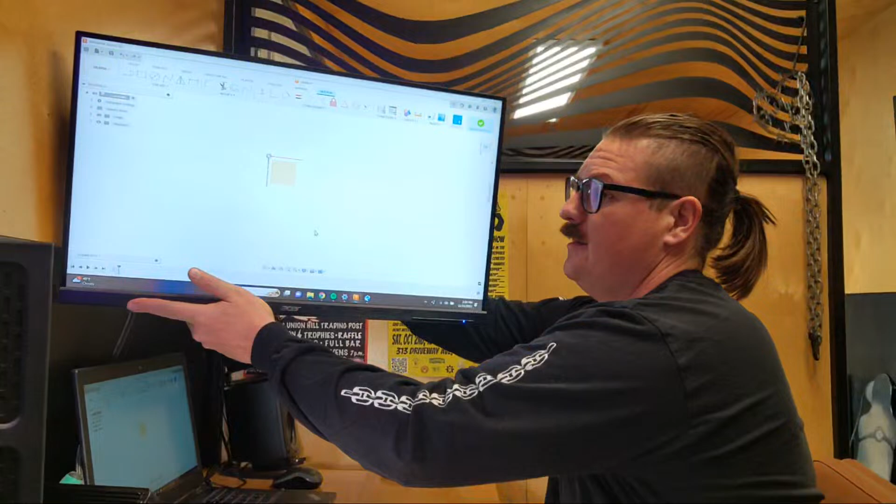So I got some bid work done, and now I'm going to design a log storage rack. It's fire season here. Let's see, can you guys see this?

Hope you guys can see that all right. The firewood is making a huge mess next to my fireplace, so I figured I would draw up a log storage rack, cut it out on the laser, and make it hopefully this weekend. We'll see if I can get it cut out on the laser. We're in full-on Christmas mode here at the shop, so I'll have to see if I can get the laser time.

Alright, let's get this oriented how I want it. Front is front. And I'm going to do kind of a basic design here. Start a new sketch.

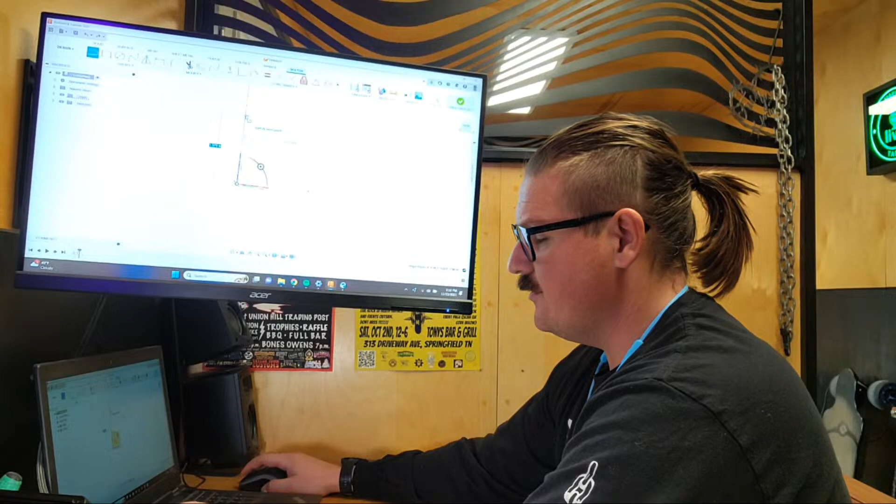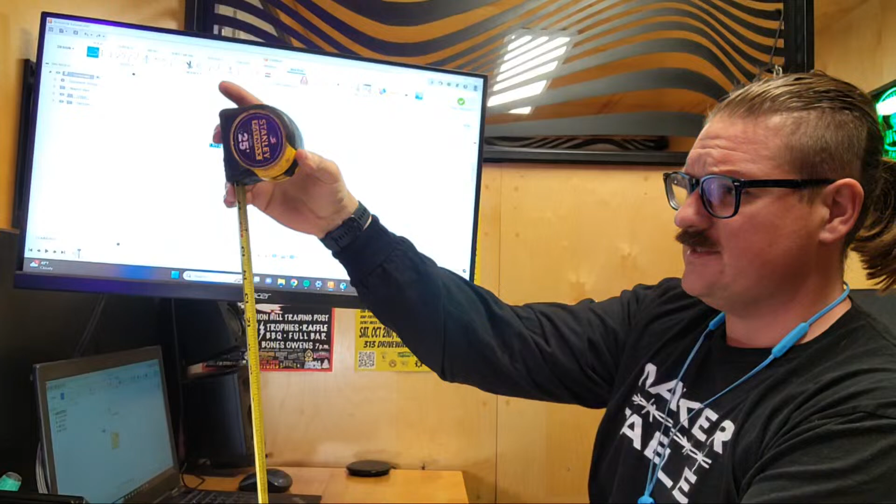I'm going to start this as a line drawing, so we're going to go up. Storage rack probably needs to be not too big—if it's too big, it's going to be heavy. I'll call it 20 inches tall overall, I think.

And then width-wise here, maybe only 14 inches or so, maybe 16. I definitely want it taller than it is wide.

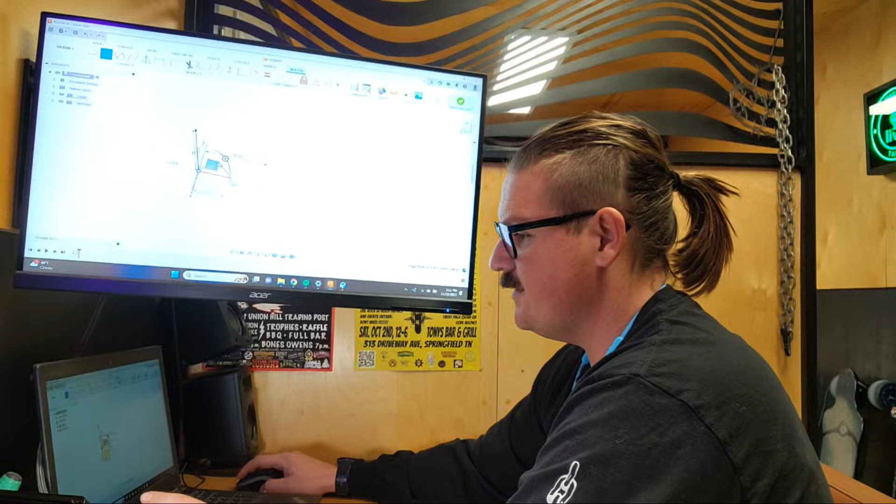Let's see if we've gone into 3D sketch here. No, we're still on the same plane. I hate when Fusion does this here—it's trying to draw on this plane down here. It's a new feature, and I'm not crazy about it. Let's see if I can... nope, it still wants to sketch on that plane.

So let's go ahead and undo that, and we'll try a new sketch. Now that we're locked on this plane, it should work out a lot better. I will resist the urge to rotate.

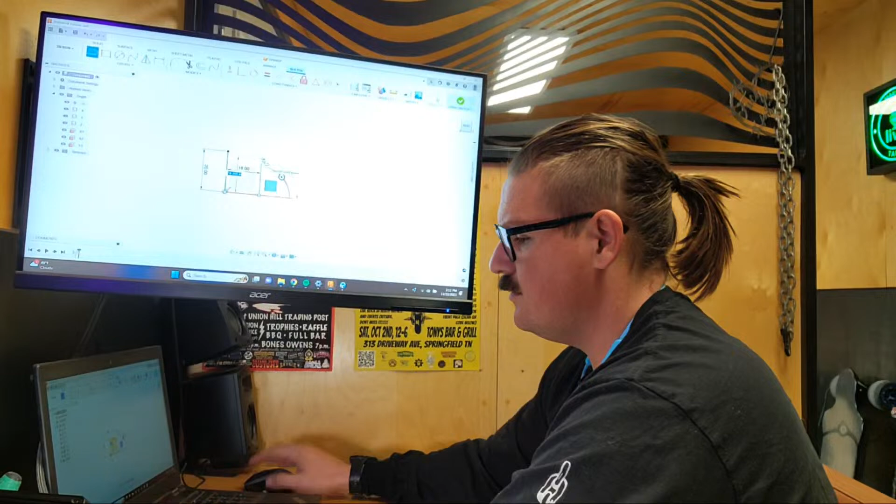Alright, so we have our basic shape here. I'm going to create a sheet metal body out of that by selecting these and then drawing this through right here in sheet metal. The average depth of a log, I think, is only 16 inches. So we'll start this out as 16 inches deep.

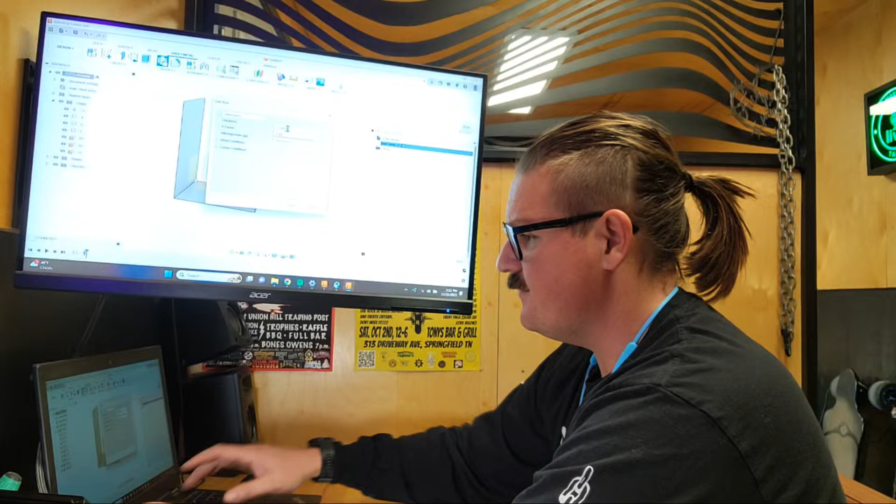I think that's looking pretty solid. And then I need to change this to the thickness of material I'm going to actually use. So I went up here in sheet metal, modify, hit the little pencil, and I'm going to make this out of some 3/16, so it's kind of heavy—0.1875. There we go, now we got nice beefy material right there.

Should look good. Eventually I'm going to fillet these corners, but I'll resist the urge to do that right now—it'll just make some of these later operations a little bit harder if you do that. But that's the basic shape.

Then I think I want a little pocket here for kindling, so I'm going to make an offset plane. We're going to bring that down, call it a 5-inch space down there for kindling. I think that should work.

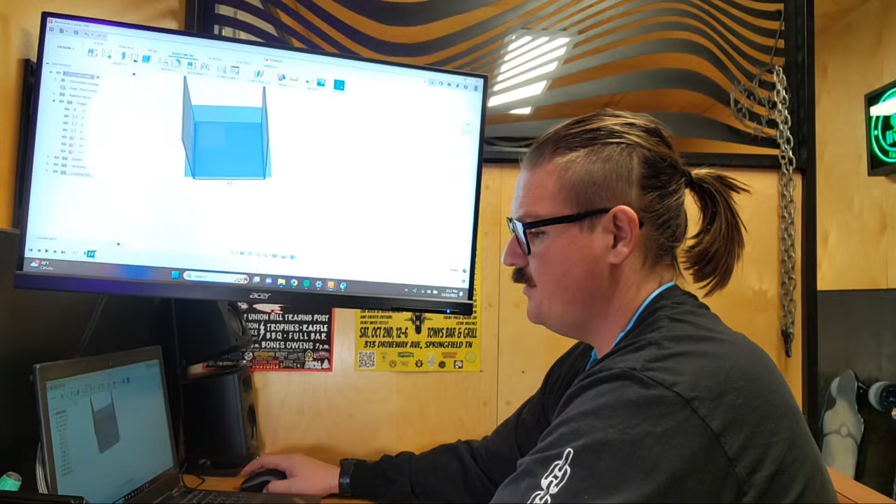Go here, and we're going to project a couple things onto that plane. I'm going to use these edges right here, and draw a rectangle off of this corner to this corner. Since we made that offset plane, we're going to be right where we want it to be when we extrude this.

There's my material thickness—make sure you select new body, you don't want to join these together yet, because eventually I'm going to export these all as plates individually and send them off to the laser as flat pieces. Then they'll get formed and welded later on.

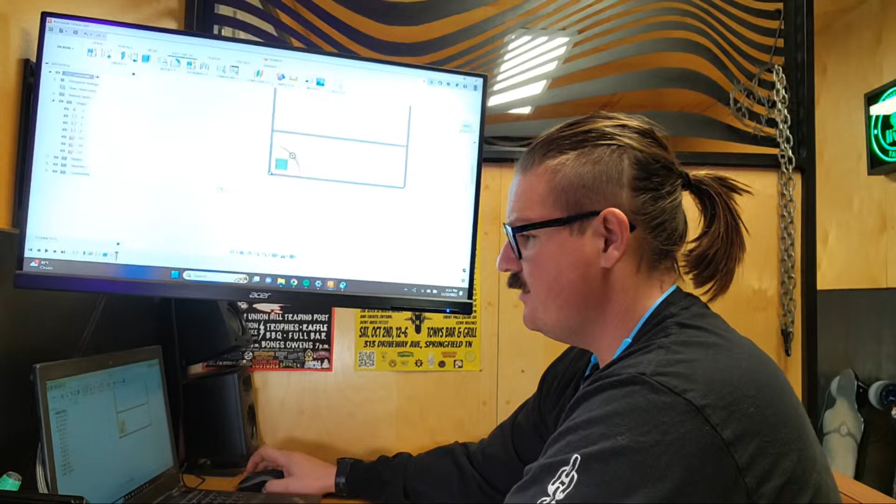So I think that's a good basic shape. Now I need to kind of play with some feet so this doesn't sit directly on the floor. We could try some—I've got some cool rectangle tube that's 3x1. Kind of see how that's going to look.

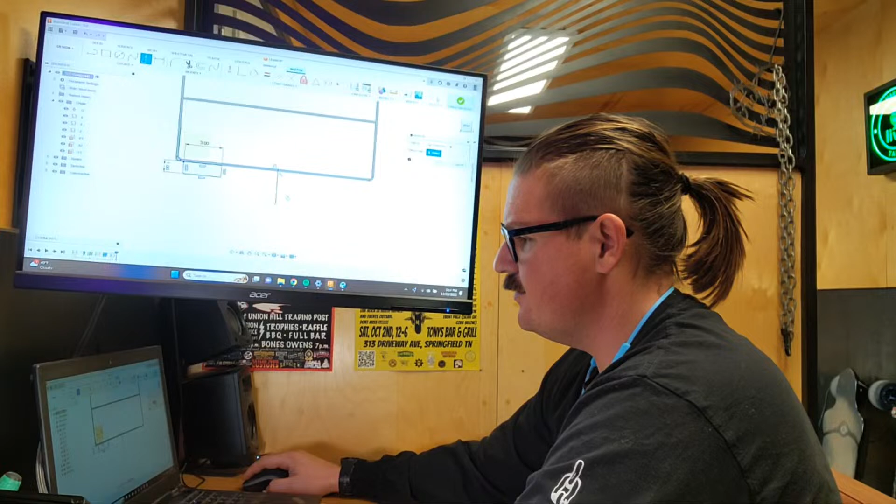Use our line tool, find your midpoint there with the delta, the triangle, and then we can use this mirror tool right here. Select everything you want to mirror, your mirror line, boom, right there—now we've got it equal on both sides. And now I'm going to extrude these, new body, and just kind of see how they look.

I don't know if I'm crazy about that. I think we could do better. So we could try to rotate these, see if it looks any better. But I'm not sure that's going to do it.

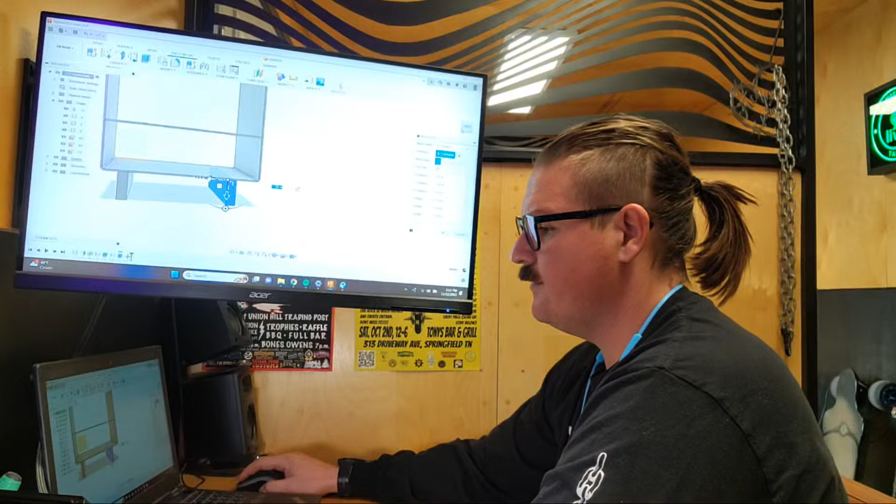That actually helped. I think because we already have kind of a rectangular shape going here vertically, if we keep the feet rectangular, it'll carry the look.

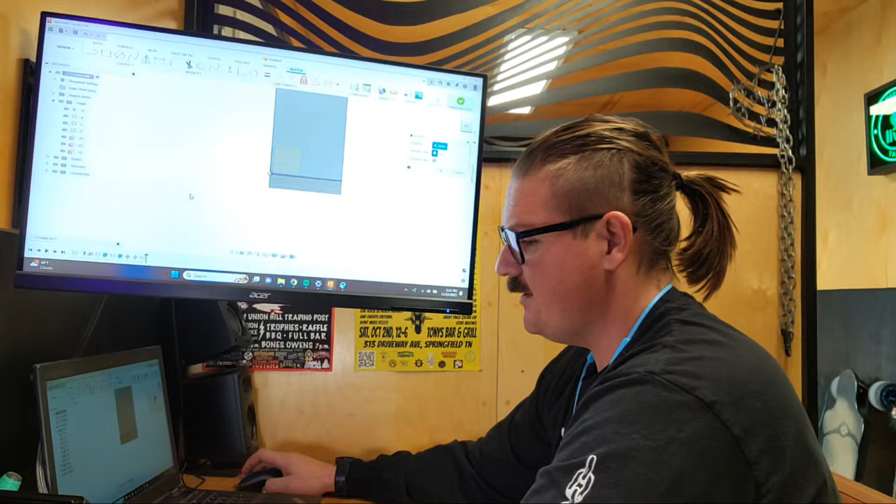So I like that. Now I'm going to make some openings here to make this a little more interesting. I'll select that plane, hit P for project, hide this first body, and project this right here onto the surface we're sketching on now. Then I'll project this onto there too.

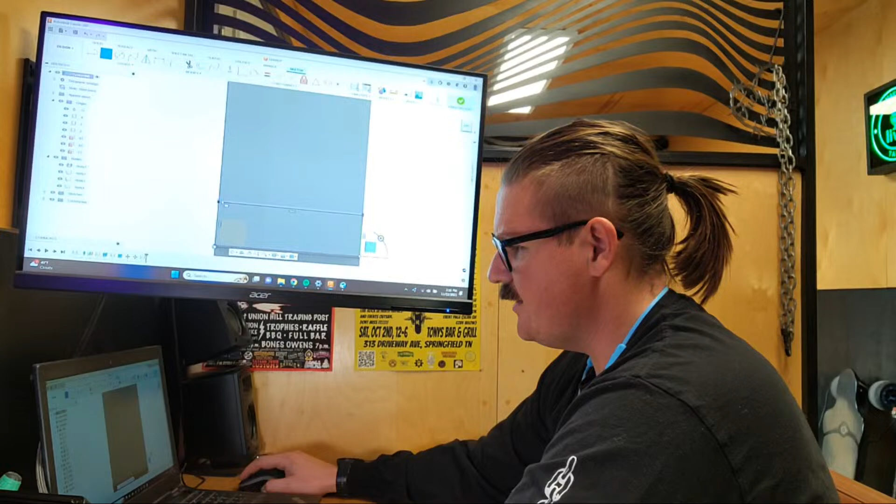And then I'll draw a rectangle here, I'll show you in just a second. We're going to use the offset tool to make an even opening on this entire body. Just hit O for offset, select that feature, that line, and then find a spot that looks cool, because eventually I'm going to extrude all this out and make it empty space.

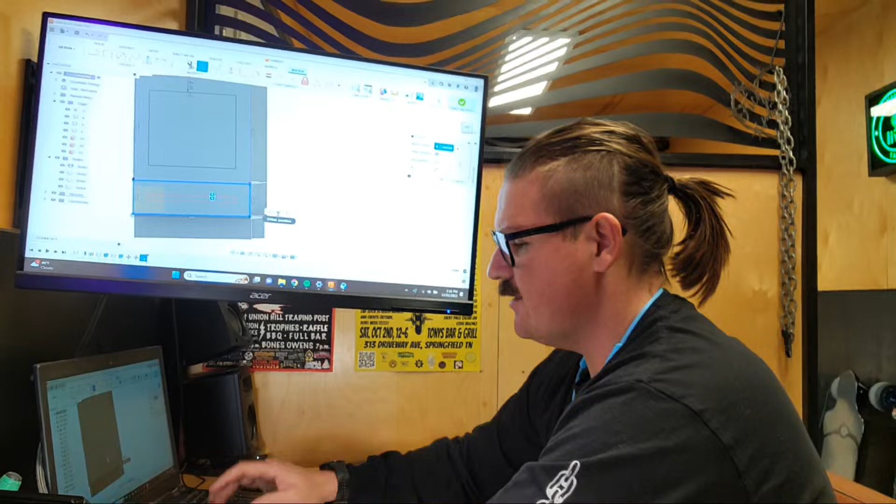So we'll do negative 2, and I guess we should really start with the smaller space down here, because that's going to dictate more what we can do. If we go 2 inch, it makes this pretty small, which if this is the kindling, we may not want an opening on the side anyways, to be honest. But let's try 1.5 — 1.5 looks pretty good.

So go back here, double click that, negative 1.5, and we can edit how that looks. From here we can extrude all the way through, E for extrude, draw that through, and bam — we've got ourselves what looks like a pretty solid log storage rack at this point.

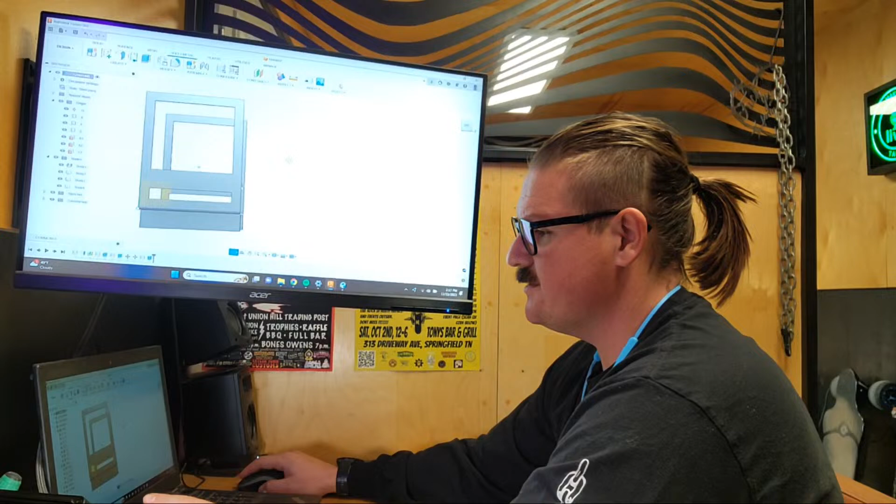So if you need to, at any point you can go back in the timeline right here, double click on this sketch, and let's say we want to see what 1 inch looks like. Double click on this, update that to 1, and then hit enter, complete sketch, finish sketch.

There we go. And it updated that extrude move because it was after that sketch, which is one of my favorite features of Fusion — this timeline. It makes it really nice to go back and edit stuff.

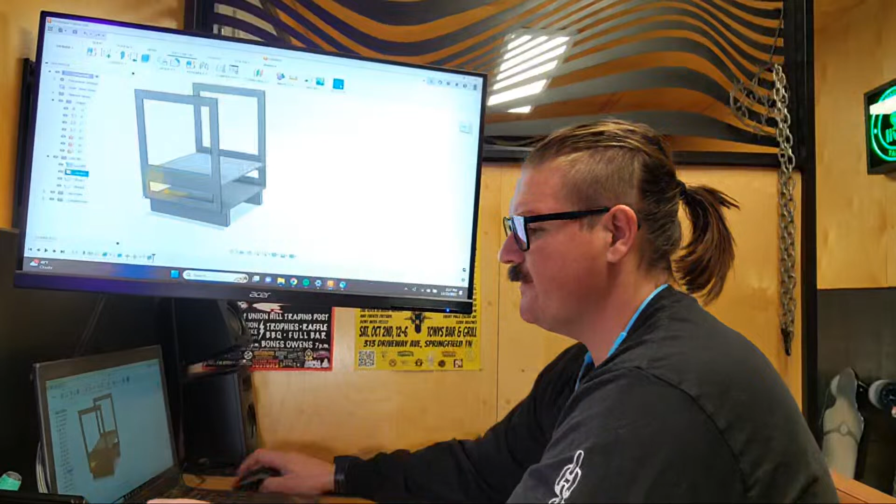But I like the thicker better, so I'm going to hit Control Z here and back up out to the 1.5. So pretty quickly, you can see we've got a log storage rack here.

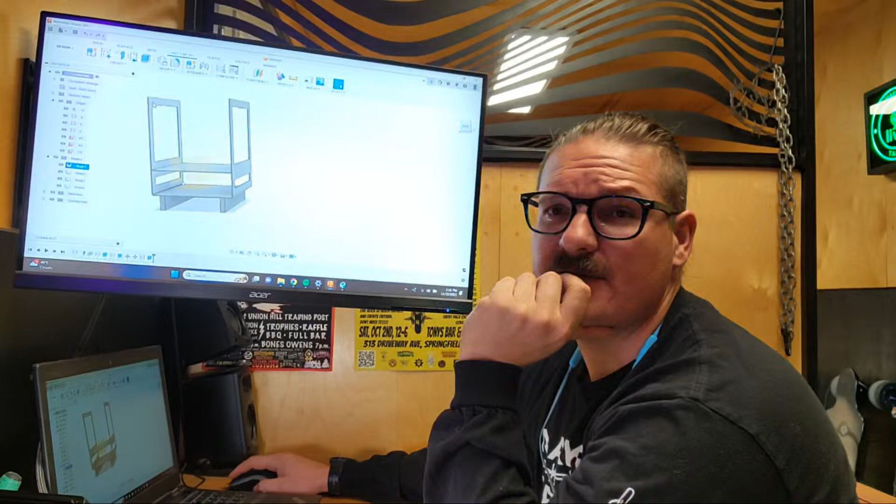We could go straight to the laser and press brake with this, but I'm afraid — let's see, if we remove that much material, this might get a little floppy here. I'm not sure how rigid this is going to be.

So there's a couple ways to fight that. One is put this material back in there, and two would be to add another plate back here that runs perpendicular to these. So let's go ahead and see what that's going to look like.

So we'll click on this face. I'm going to project all this sketch geometry right here, make sure all that comes through. And then we should just be able to take a line across the top here, close that shape out.

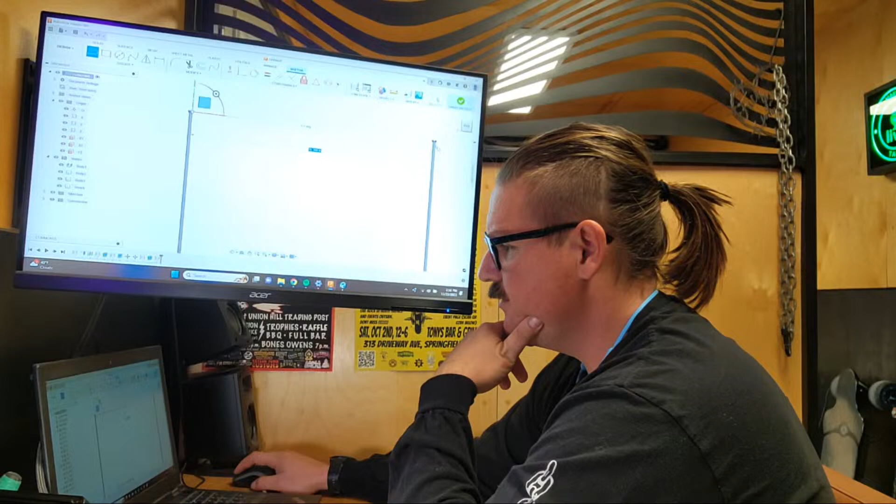And then we can use our offset tool again. No, it doesn't want to do it here, of course. Let's see if we can select this. Nope. Alright, so let's use our offset tool.

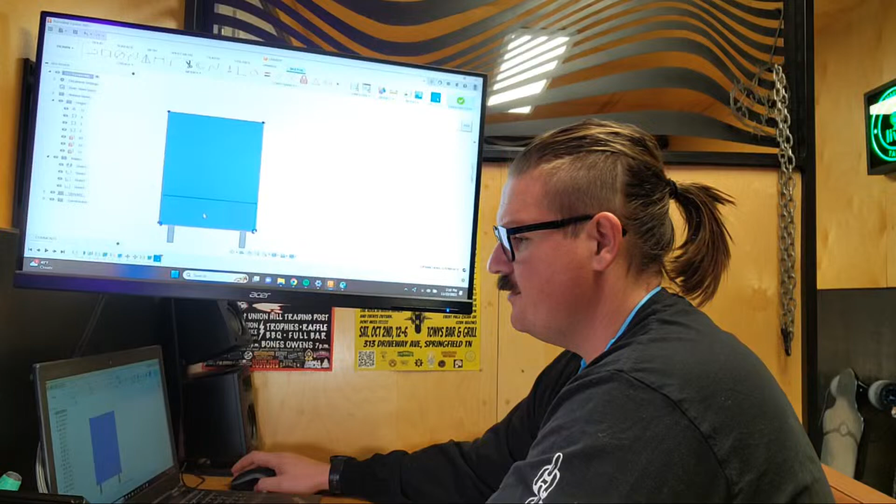We really have to take this shape, extrude it out 0.1, we'll do a new body here, really just doing that to get this whole profile over. And now we should be able to double click on this, single click, and then hit O for offset — now we have a defined edge.

We can do the same trick we did on the borders there. I think we used 1.5, so let's just stick with that dimension, keep everything looking cohesive, like it was planned this way.

And then from here we can draw some lines straight up to the top, straight up to the top, and now we can extrude this out.

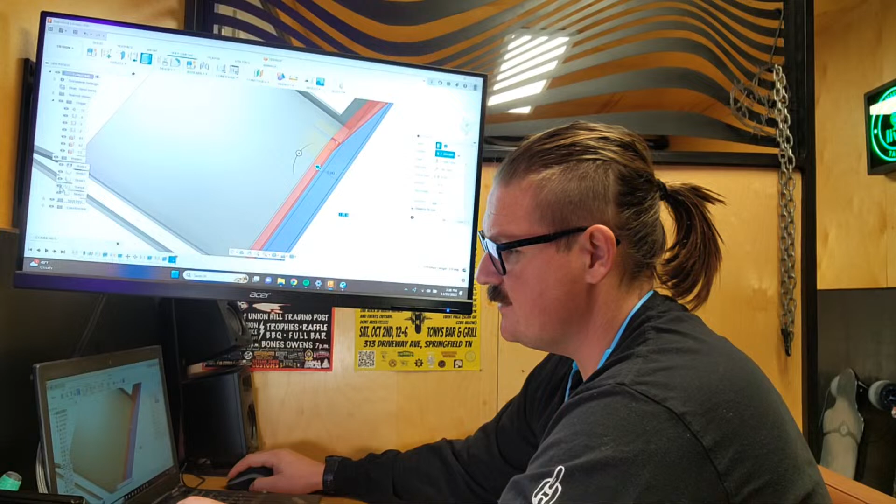But if we do that, it's going to actually cut this plate right here. So we need to make this plate invisible — where is it? There we go. Before we do this cut operation.

Then we can make it visible again. So there we go, now this trim is nice. I think I almost want it on both sides now that I see it here, it just gives it a more finished look.

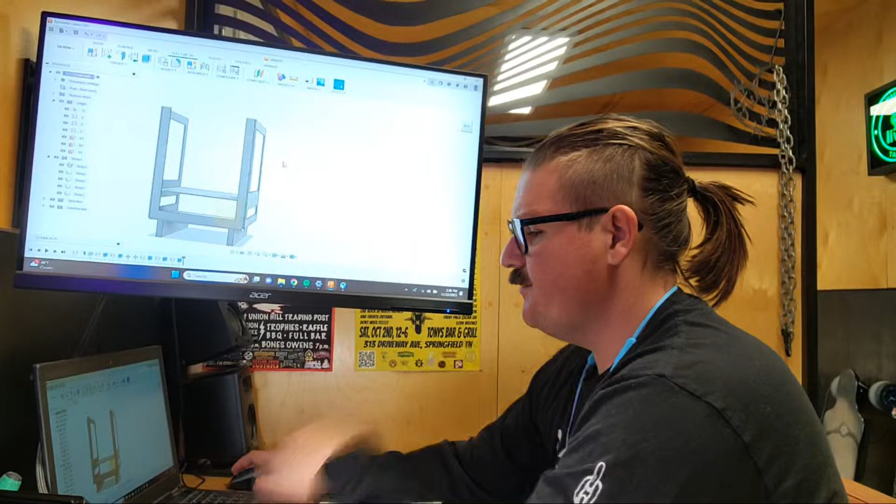Now that I'm thinking through this, the brake will not be able to bend this all as one piece. So I'm actually going to end up having to put a seam in this design, probably in the middle, or I could try to hide it and line it up with one of these feet.

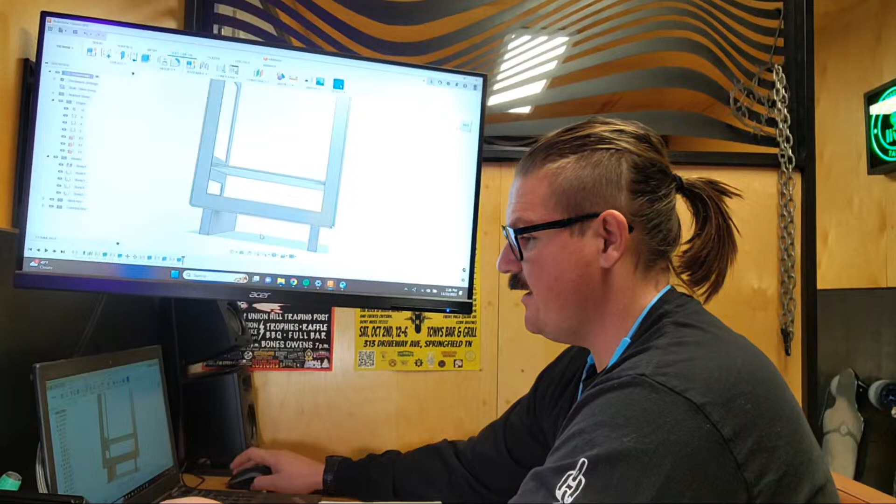But with this appearance plate we have, I can also do a Q move here. Should be able to do a Q, which is a press pull, and we're going to press and pull all these faces. I should be able to select all three of these, then pull them out and click on this face I want to drag it to, and it'll automatically snap.

There's my 3/16 that I put in for the plate. So now this plate actually swallows the other plates back here. So when I add a seam, this appearance plate will actually cover that seam right here.

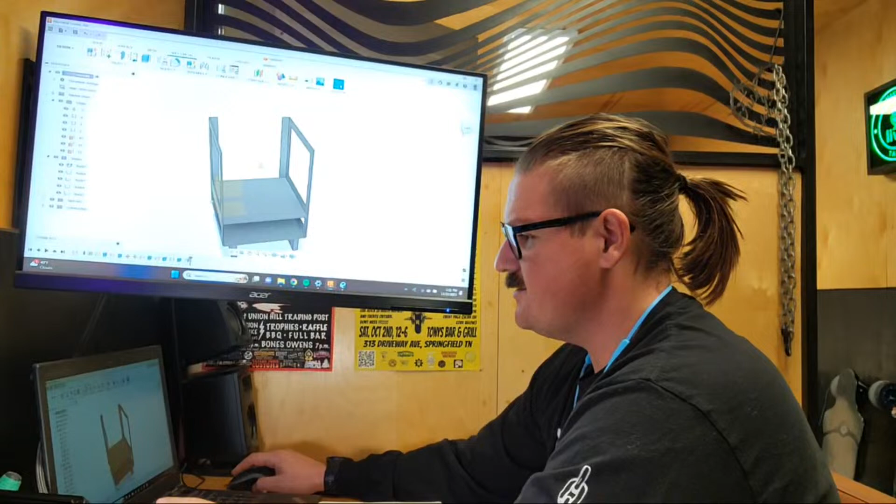I could save a little bit of money and cut this out of 16 gauge. It doesn't need to be very stout, but then it's going to look kind of cheesy and have a sharp edge right here if I cut this out of 16 gauge. So I'm going to keep this all as a 7 gauge product here.

So I think we did a 0.1, let's check, we'll do our inspect... see how much... okay yeah, 0.1 was the original extrude.

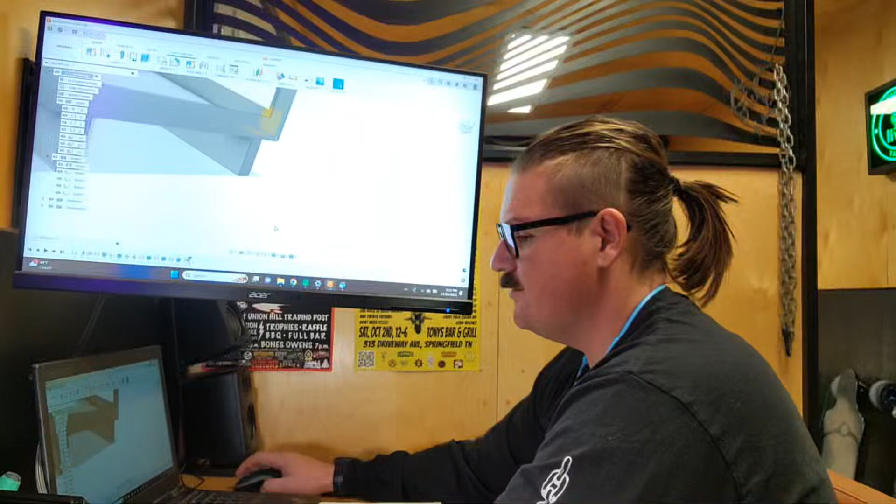So we're going to Q again, do the press pull. I'm not going to use extrude here because sometimes when you extrude and hit join, it's actually going to try and join that plate to the rest of everything else that it touches. But if you use this Q offset face, it's just editing the feature that's highlighted.

So 0.1875 is our thickness, and we've got that there.

So then I'm going to duplicate this across and see how it looks. Oops, undo that. Move, hit this, hit create copy down here, and then I'll slide this over and snap it to this face.

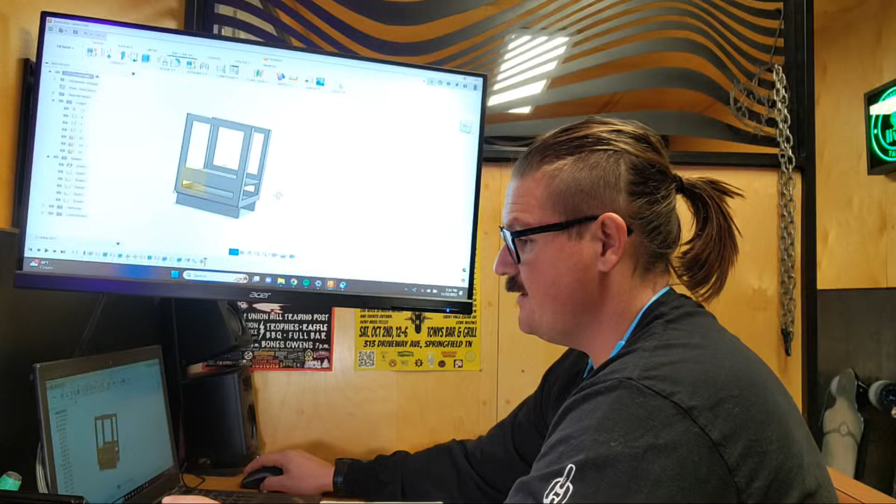Yeah, that's a pretty nice look right there. Super clean, really stout.

So now the question is, do we need to add a plate up here? Let's just draw it up and we'll see what it looks like. That's the best thing about CAD, at least one of my favorite things, is you can really see what something's going to look like without spending really any money at all. You just have your design time.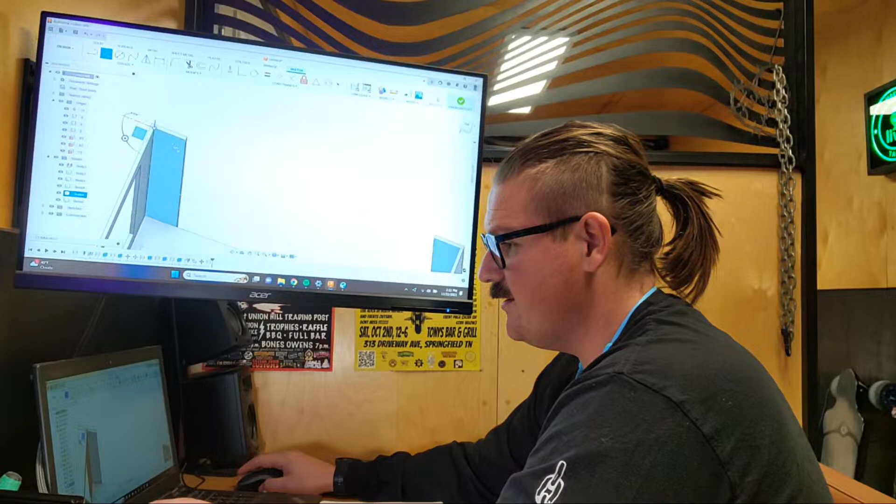So I'll go from this corner over to here, where previously, before I learned these tools, I would go out in the shop and actually start making stuff. Or I did a lot of cardboard cutouts and stuff like that.

Hit new body here so it doesn't join the rest of everything else. We're going to do a move, create copy, slide this over. Okay, this is pretty clean.

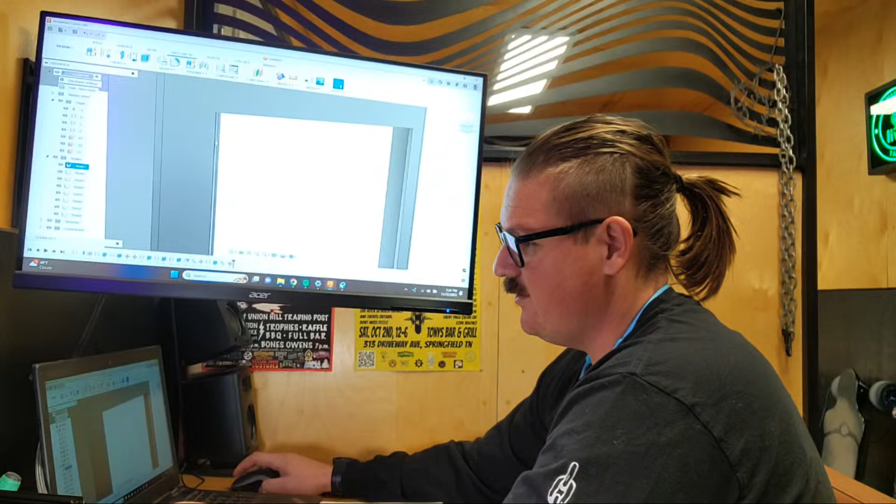Also some pretty sharp angles going on here. So I don't like to keep stuff quite this crispy, I'll call it, with this really hard 90-degree corner right here. I know I've got these hard corners all over in some other places, but I have a round over tool that I think is going to work well on this. So I'm going to take a look at this and start doing an F for fillet on here and see if I can fillet this.

I don't know who's hanging out with me here, but really appreciate it. Let's see if I can see comments... I think I'm in chat. Anyways, let me know where you're watching from.

We're just north of Nashville in a little town called Springfield in Tennessee. It's been good to us.

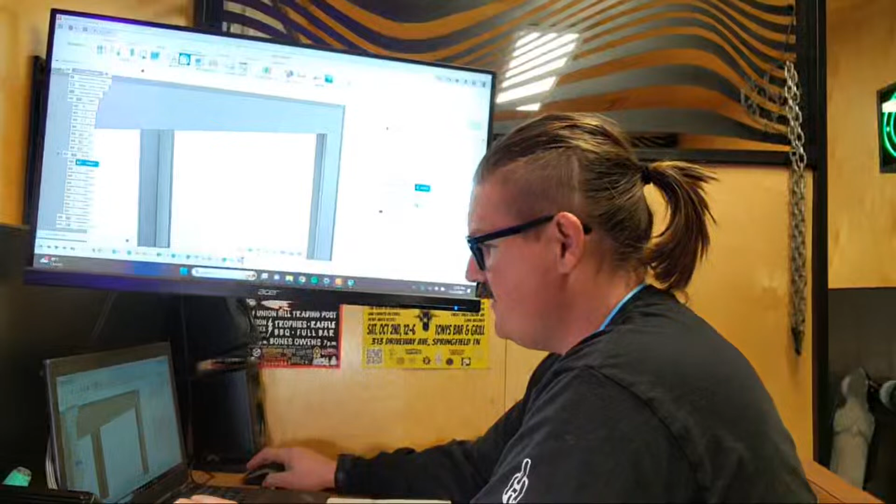So here's F for fillet, and I know for sure I'm going to want to round these corners over, and the same down here.

So remember when I said not to fillet those corners in the beginning? It's because that offset tool is a lot easier to edit and adjust if you have sharp corners. So I don't like to do my fillet operation until basically one of the last steps, when I'm already really happy with the design.

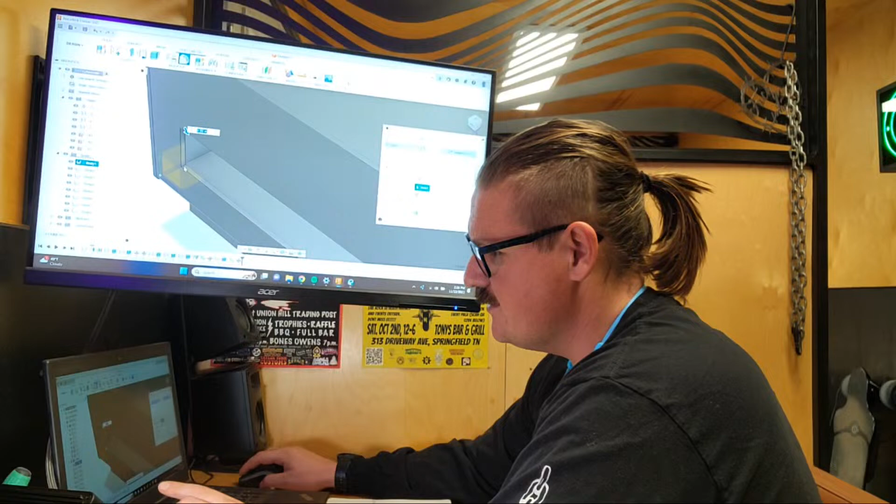Because I have filleted before, and then two of the corners will be rounded, the other two will be crispy and hard 90s, and then you're sliding around on the timeline and doing all kinds of stuff, sometimes deleting and redoing it. I've just found it's easier to hold off on my fillets.

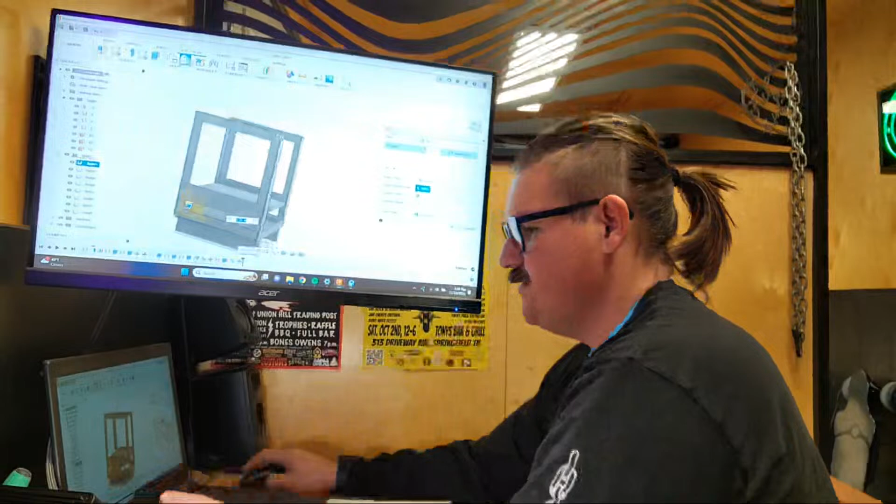So here we go. That's a little too aggressive for the design because everything's so crispy up here, but I think a 1/4 inch, really I guess we should use this radius right here as inspiration because we are going to bend these plates right here.

I'm not sure what happened to this overhang. I can dress this up here, or I could just hit it with a flap disc later on the fab table and round it over. If it was one of my drafters, I'd tell them to fix it in here, but I'm going to be a hypocrite and I'm probably just going to leave it, just because I'm the one that's going to fabricate this, so I can sign up for my own little extra work. But if this was for a customer, we would spend the time in CAD.

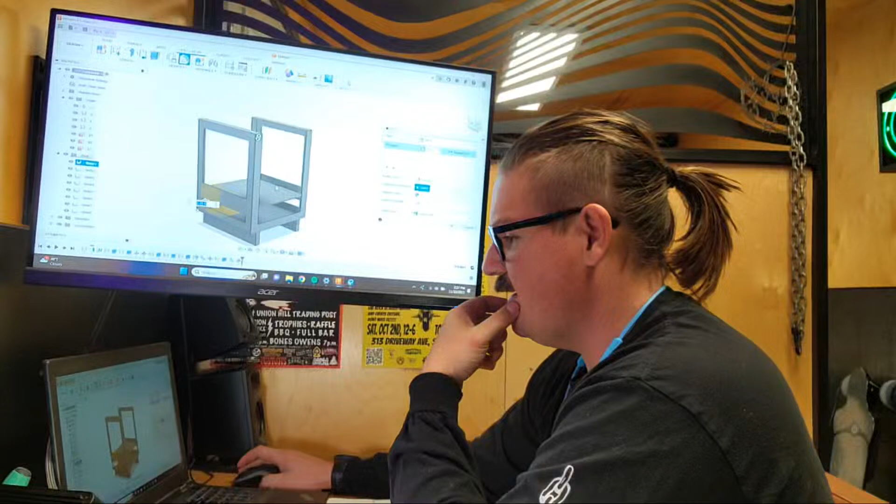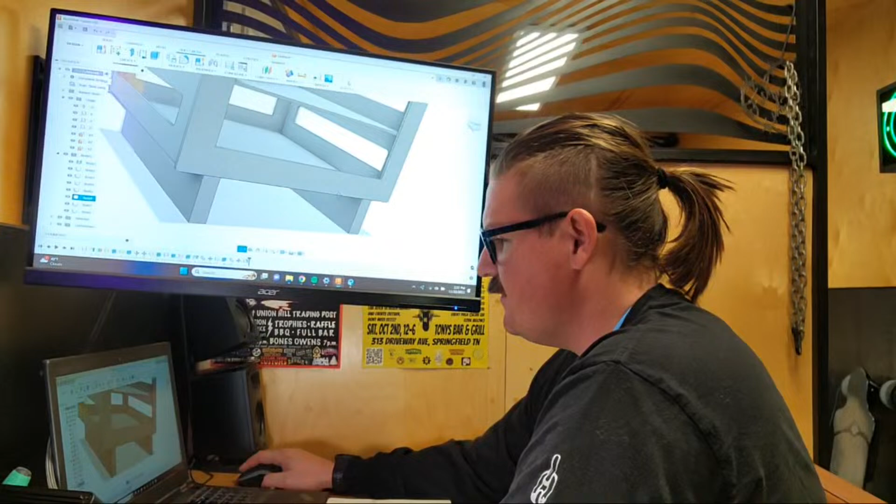Yeah. What do you guys think? It's looking pretty decent. I actually don't know how I like this down here at the bottom now that the log storage, because this is going to be my kindling. So I don't know if having the lip down there is just going to collect trash and end up being a pain to clean out. So let's take a look at this and see what it looks like if we take this all the way down.

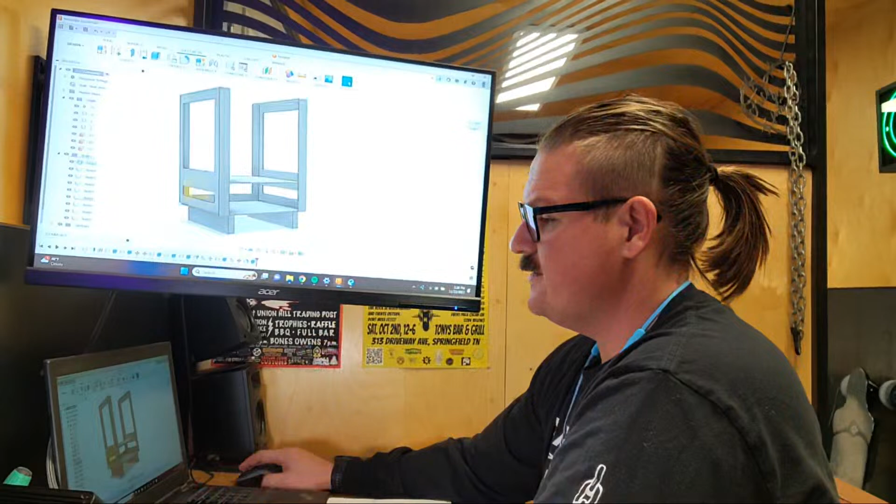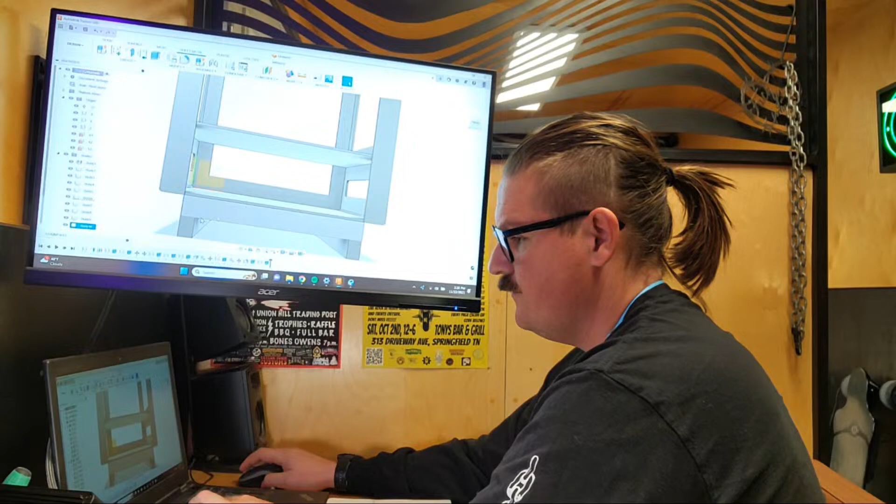I don't know. Which side do you guys like better? We got this side right here with an open front, and this side back here with the closed front. We could also, well, if we cheat the eye, so I was thinking we could take a plate down here. I'll show you what I'm thinking. We kind of take a rectangle here, and drop that down 1.5 inches. I'll hit new body. And then we could drop these corners all the way down. Let's see what that looks like.

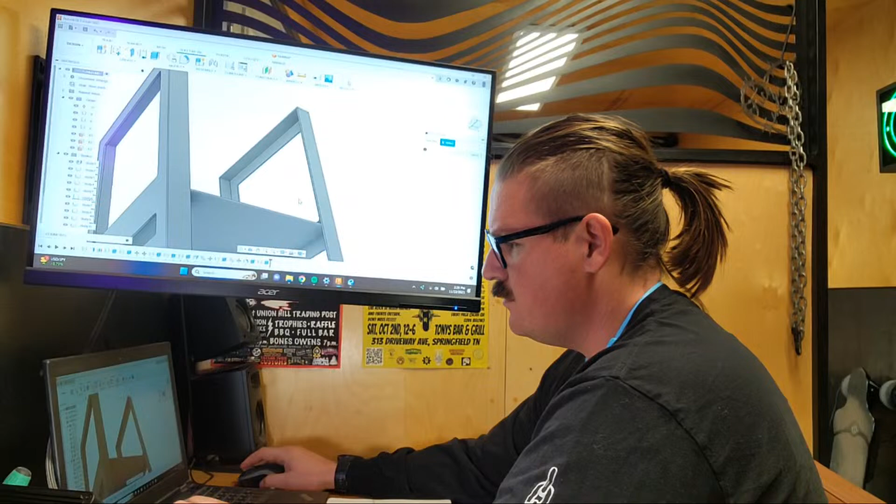This is the Q press pull tool. Yeah, now it's just starting to look sad. Okay. So, back to the original question here. We've got the open front at the bottom. This is the kindling section down here. And then this is log storage up top.

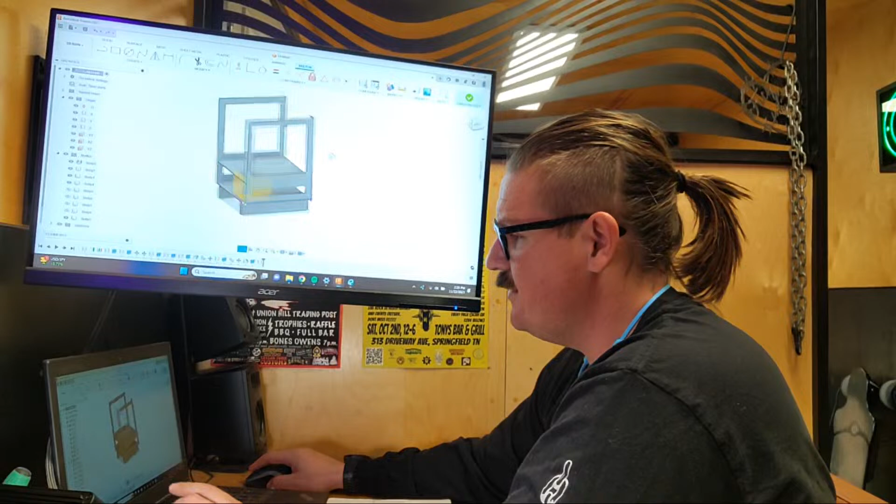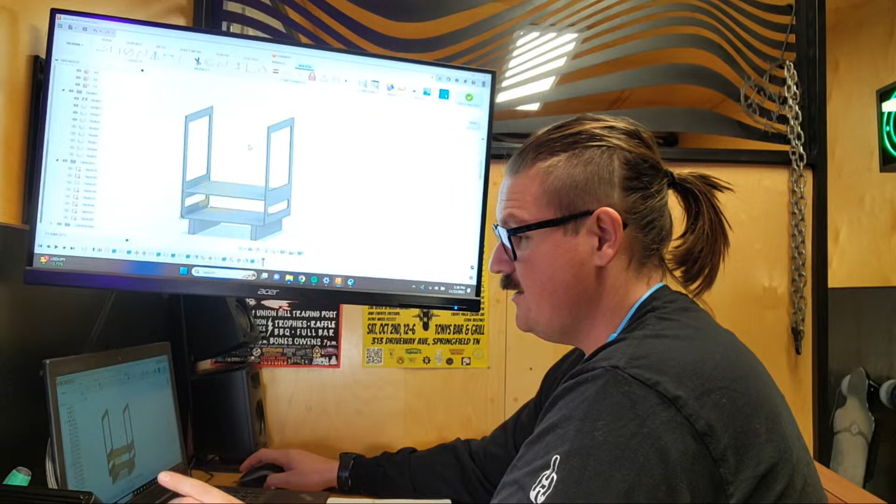I don't know. Honestly, the other thing we could do is we could design this or cut this all out and hit V to make these invisible. V, toggle visibility, V again. Because I do like this a little cleaner, to be honest with you guys. I really just wanted a sleek kind of a look like this. So I think I'm just going to go ahead and make it this way, and then if it needs to be stiffened up, I can always go back and do that later. But I don't think logs sitting in storage need that robust of a design, to be honest.

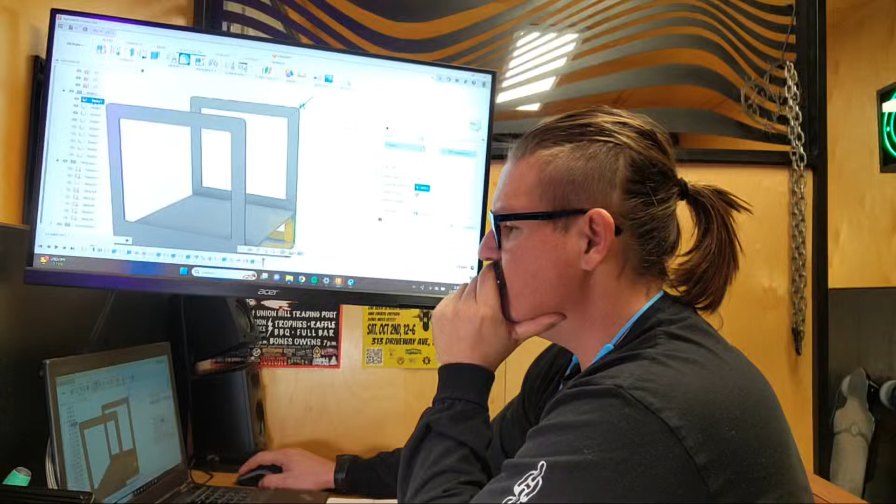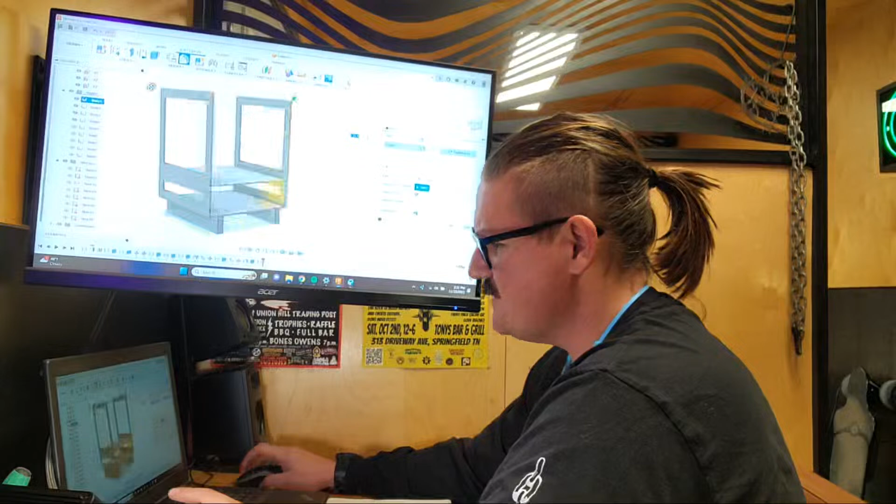So let's just keep doing our fillet here. And now that we've gotten rid of those plates and those hard corners, we can actually get more aggressive with the fillet and soften this design up a little bit more. Yeah, so there's a 1/2 inch or the quarter. The quarter looks nice, honestly, guys. It's just broke enough to not be a sharp corner, but it still looks, I think, hard, if that makes any sense. Not too friendly or preschool-y. Okay. We'll call that good right there.

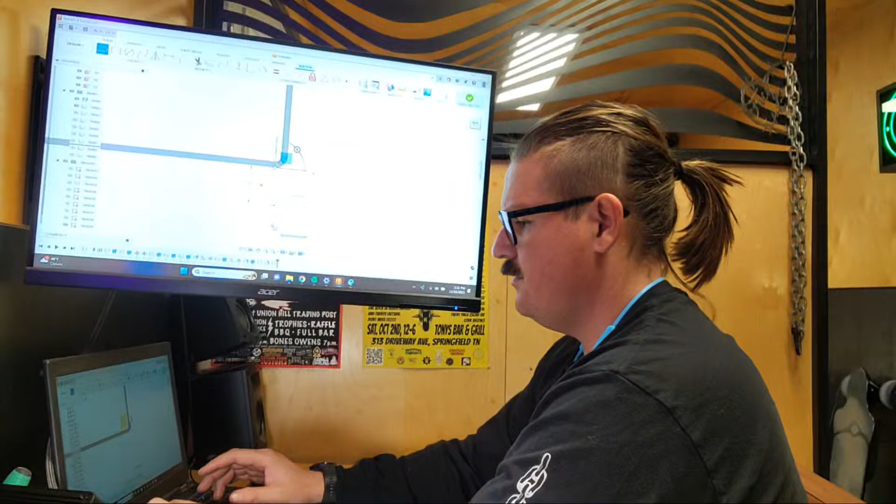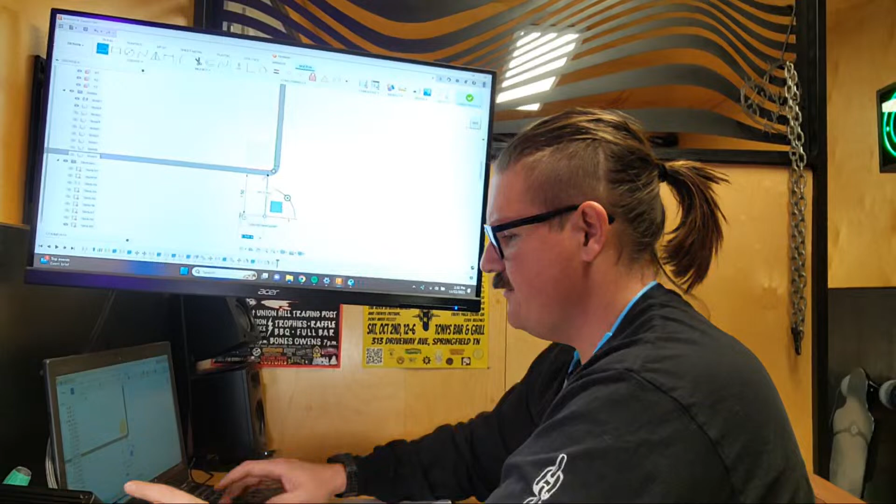But then I'm really not happy with these feet. So I'm going to go ahead, let's toggle visibility on those. And then let's think about a formed foot here. We've got some other form work with the press brake. So I'm going to start with another line drawing. And we will go 1.25 inches. Oh no, we'll stay with the 1.5. We have the walls. So let's keep all this 1.5, 1.5. That'll make it look nice and cohesive. 1.5, and then another line 1.5 up.

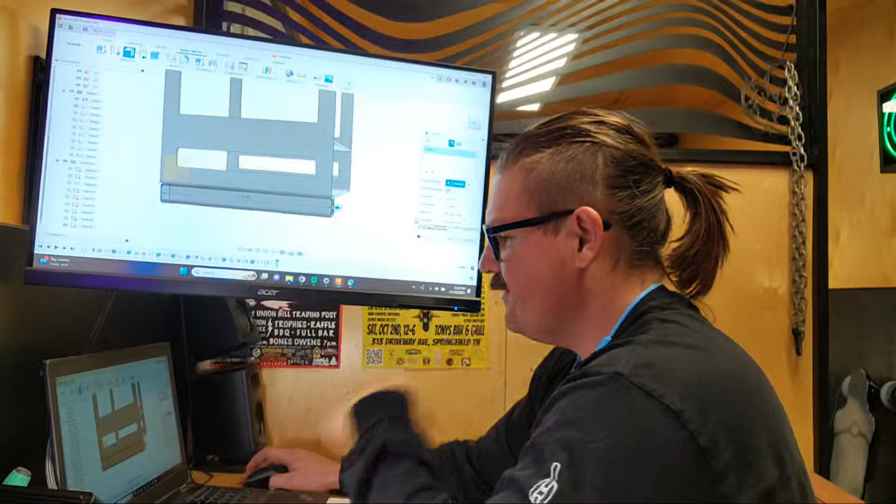Gonna go back to sheet metal, select that profile, and then a new flange here. And we're gonna draw this all the way to the back. 16. Let's come 1 inch back. Well, let's go 1.5 inches back from each side. So this is one of the other cool things about Fusion is you can do your math right in here. So we're at -16. So we'll do +3 because that'll be 1.5 inches on either side.

Oh, now it doesn't want to cooperate. Well, I'll just do the math in my head. So -13 inches. That's what I'm going for. Go ahead and move this back 1.5. And we'll see how that looks here.

I don't know. I think it needs to go full length, honestly.

Gotta turn off my heater, I'm burning up.

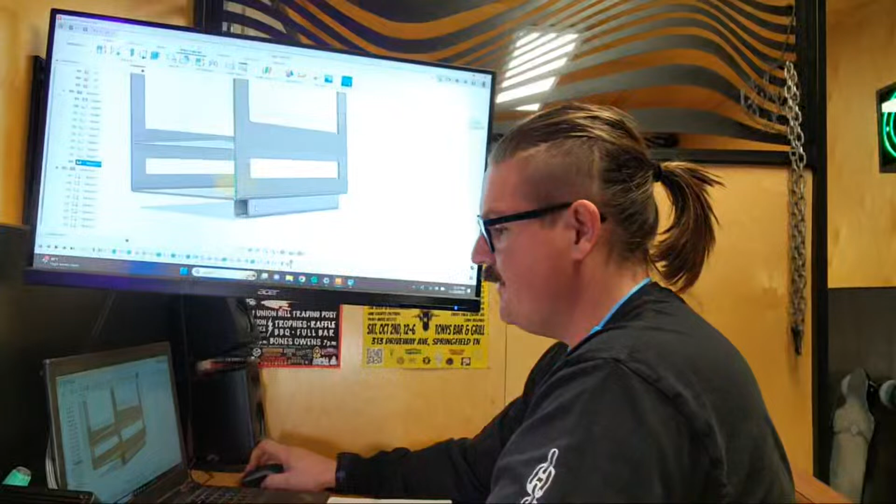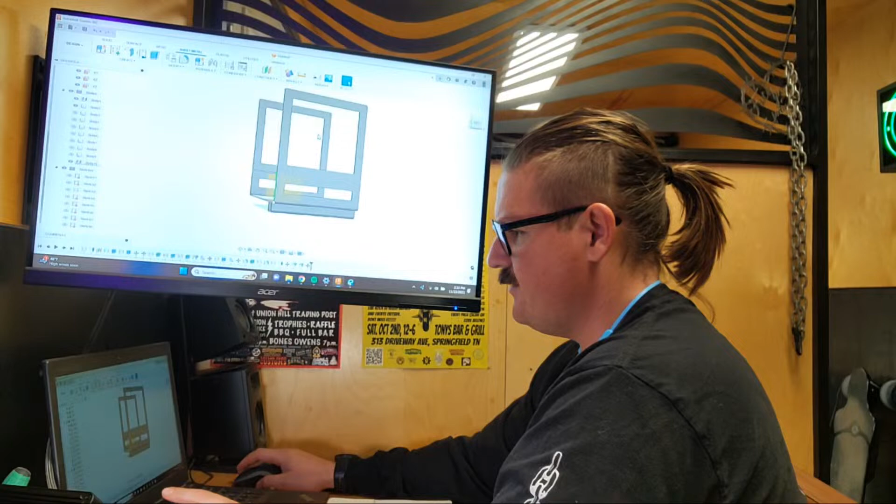Okay, so let's do our Q move again here. And we'll cue this side as well. Okay. And then we'll inboard this, and we'll just come in an inch. And then we've got the cool cutouts on the side right here. So let's do some cutouts as well on this flange.

So we're going to project this bottom portion onto that sketch so we can grab everything easily. And I'm going to make some rectangles here. For reference, call that 3 inches in. Over here, we'll do another 3 inches in. And then from the top, we'll do the bottom up. This whole thing's 1.5 inches, so let's do 1 inch. 1 inch even. And then we can go ahead and extrude. We're going to cut through.

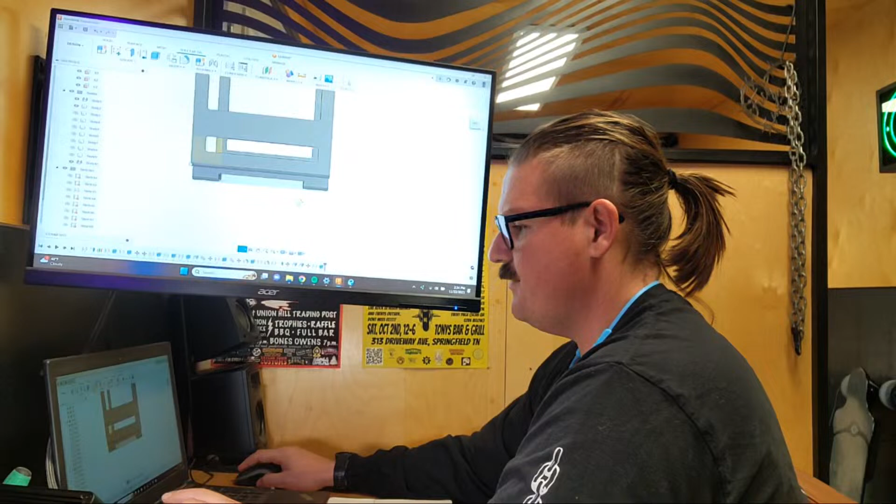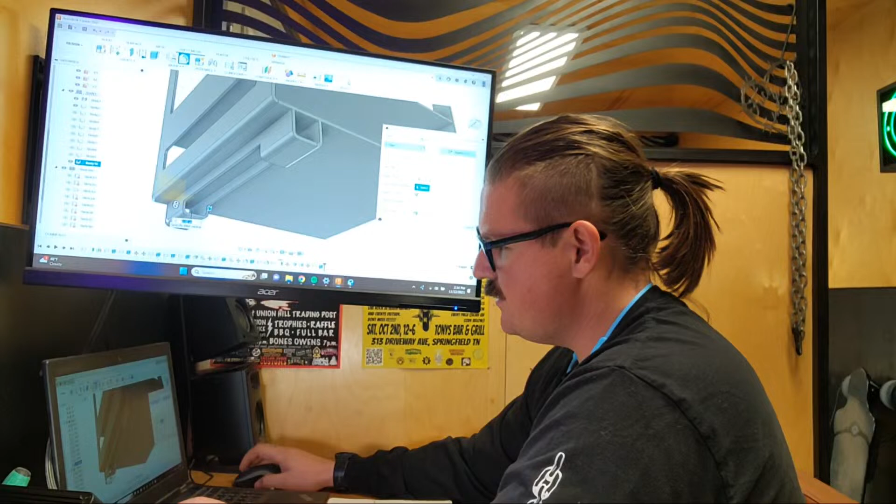And I think that makes the foot a little bit more interesting and helps it match the rest of the design. So let's also go in here and we'll fillet these corners. We're doing 1/4 inch everywhere. Come on, you can do it. This one, this one, this one, and this one. Yeah, look at that. That turned out really cool. Okay, so we've got our feet, and we're in good shape.

So now I'm just going to add some tabs and slots here for the design. So go ahead and toggle visibility right there, and going to draw just 2 rectangles here. We'll go 1 inch, and then 0.1875 is our material thickness. Oh, move the decimal point. And then we'll mirror that, so find our delta, escape, mirror, double click. There's our mirror line. Nice.

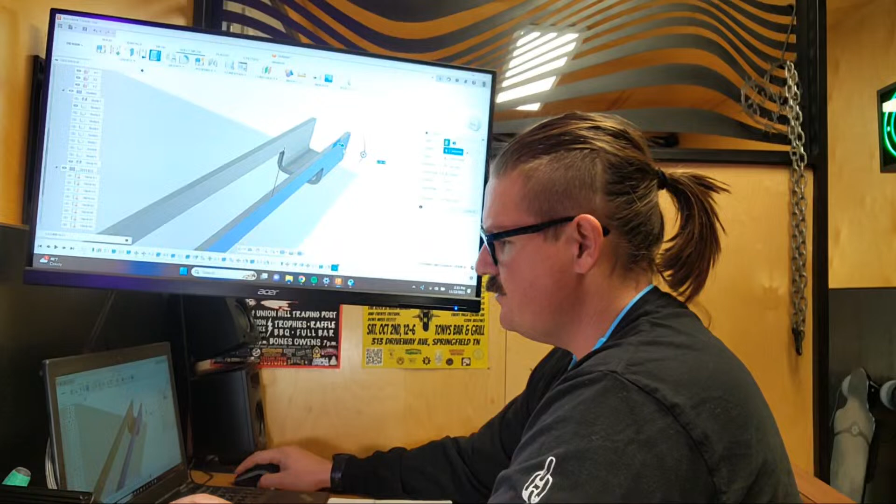All right, so now we're going to extrude these 2, drag them to the back, and we're going to join this time. All right, so now we've got join, and now we can toggle our main body again, and we're going to use this cool tool called Combine Cut to cut the slots that correspond with our tabs. So I believe it's over here in solid, combine, and then target body. This is one we want to cut. Tool body, this one we want to use as a tool, and we want to keep tools, otherwise it'll delete it.

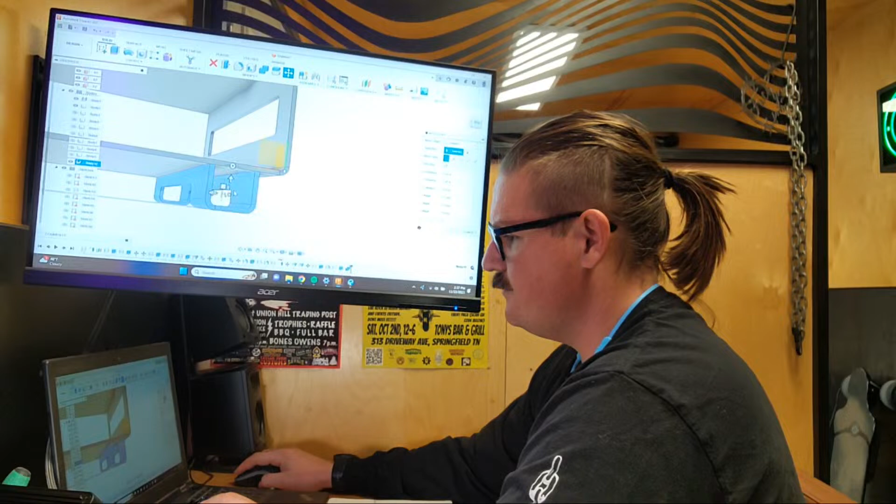Alright, so now if we toggle visibility here, nope. Oh, I did a combine. So you have to highlight this cut, otherwise it combines them together. So now you can see we've got those tabs and slots living together. See them fit right in there? Beautiful. All right, and now we need to repeat the operation and put the same things on the other side.

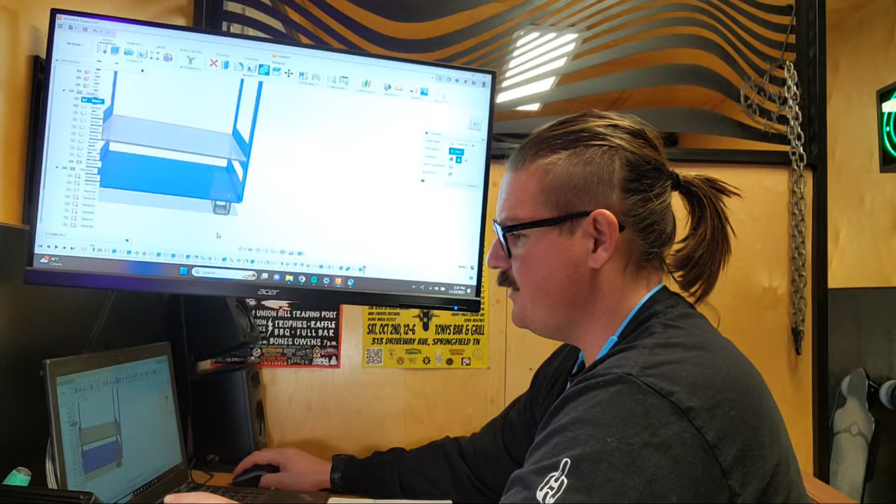So here's this little trick. We're going to select that face, P project, and we're just going to click on these guys. And now we can extrude them. Drag these back. Make sure they join. Boom. And then same thing here, we go back and we can do our combine cut. So we're going to combine, cut, target body, tool body, keep tools.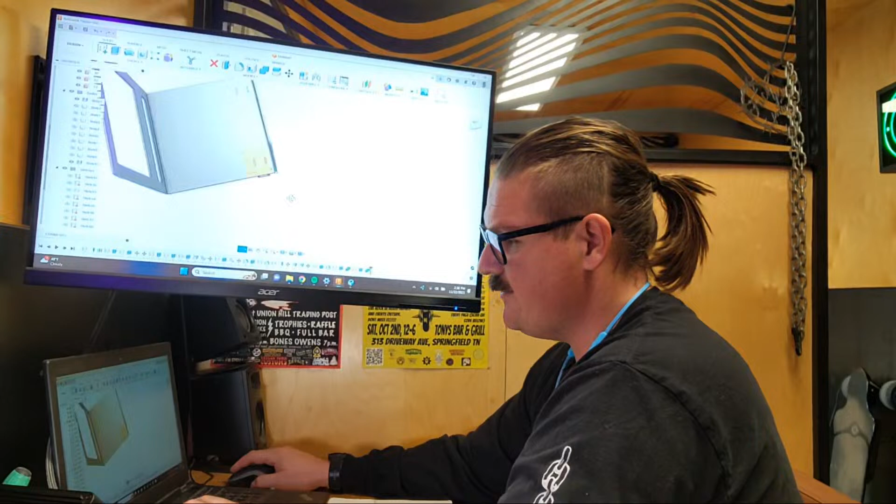Okay. Now we've got a full set of slots, and this will keep us from doing too much fillet welding down here. We can actually put all the welds on these slots, and the whole thing's going to look a lot cleaner in the end. So now we just need to duplicate that on the other side. Draw ourselves our mirror line here. So we don't actually have to model everything. We don't have to model the other leg.

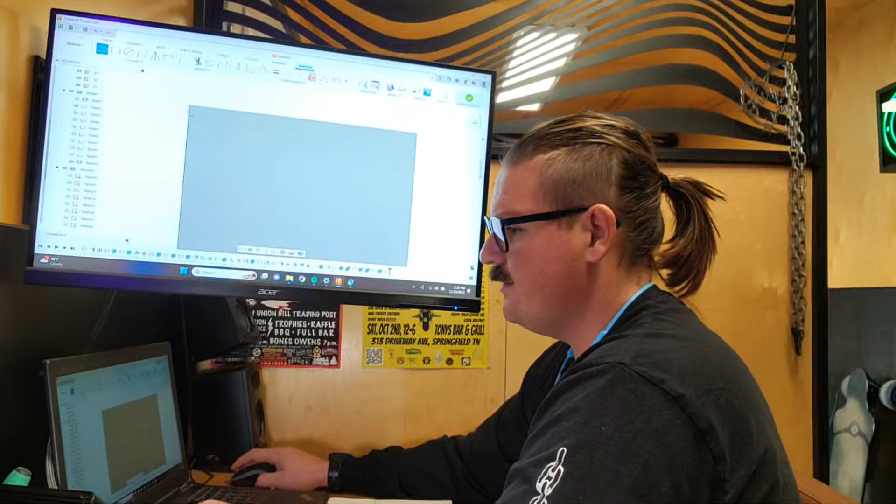And then we can take this here, here, here, and here. Nope, not that. That. And cut that out. So now we know that this foot, when we cut 2 of them, will fit over here. So now we need to locate this plate in here as well. So we'll go ahead and do this. Get our line going. We'll start this in.

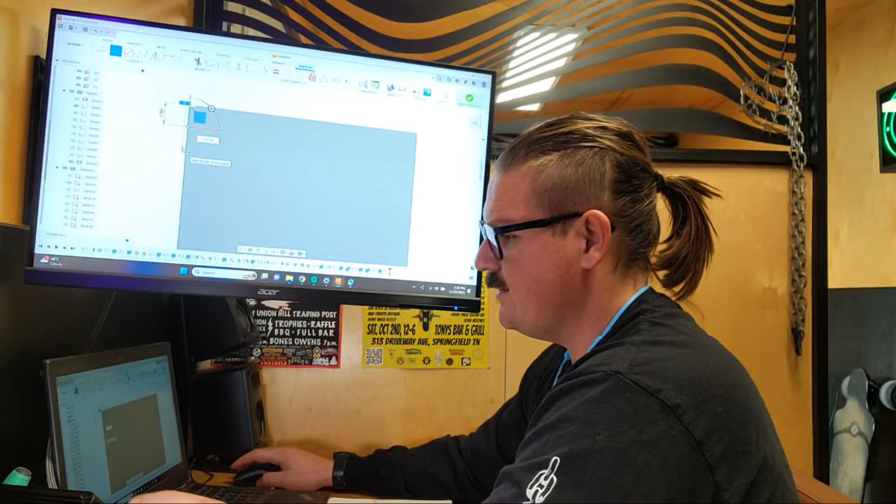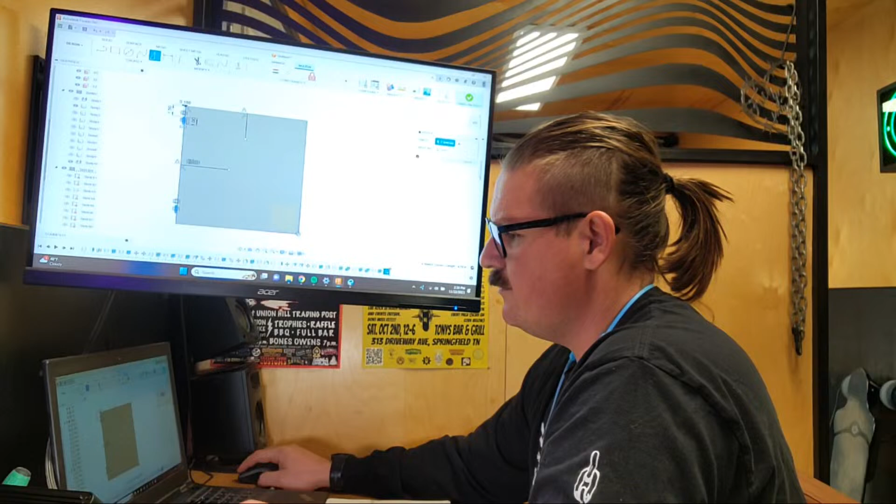Oh, actually 1.5 in from the edge. Then it'll line up with our current design. And this will be 0.1875. And we'll do that 1 inch long like the one on the feet. So I'm going to make myself 2 mirror lines here. We're going to mirror all this stuff. Is that 90? I hope it's 90. We'll find out in a sec. So mirror will come down this way, and then we'll mirror this again over this way. Then we can extrude all these tabs.

There we go. And then, as you guessed it, another combine cut here. So combine, target body, tool body, keep tools. And we'll make sure this thing, yep, actually has our slots. Nice.

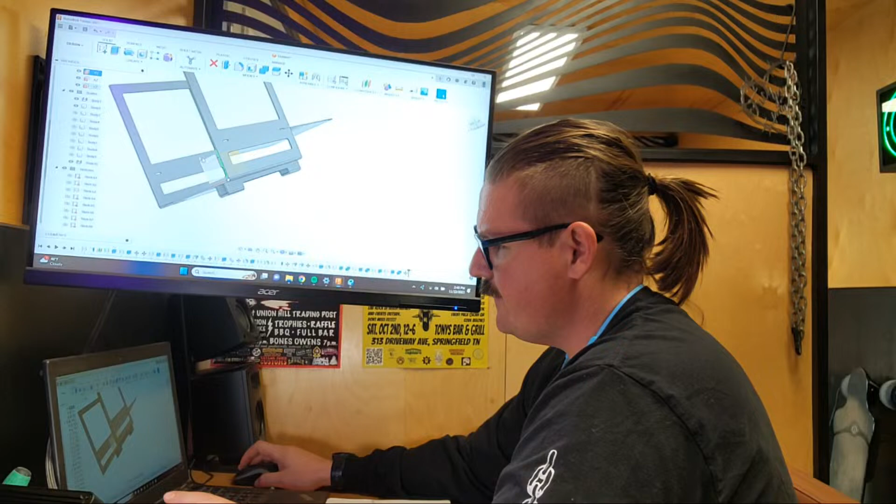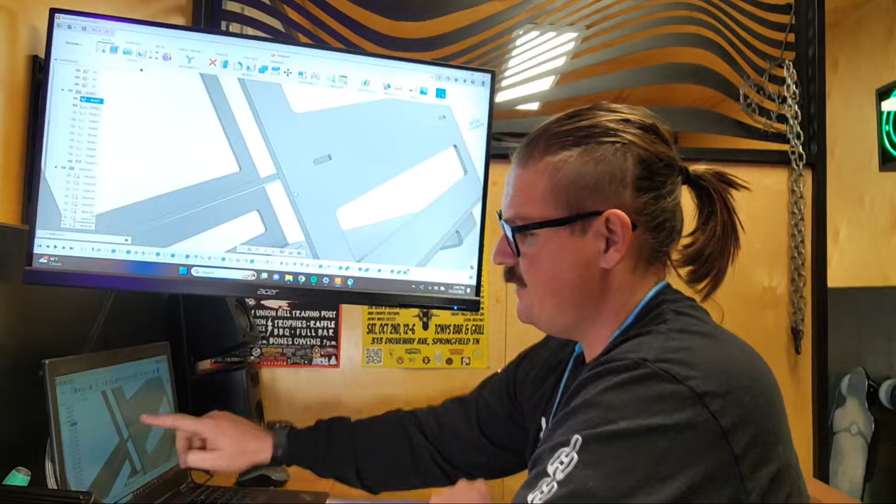All right, last thing we need to do here, oh, there's 2 things. I need to actually make these tabs slightly shorter. So I'm going to do negative 0.08. We'll cut those out. That way I can put weld in here, and the weld will have somewhere to live inside of that pocket, and then I can flush grind it down at the very end, and it'll actually look like it wasn't welded

at all. But if you leave these, then your weld builds up on the top of this material, and when you go back and try and grind that weld off, it grinds the whole weld off, and then there's nothing sticking it together anymore. So you always want to trim back this little tab here for later welding so that you can flush this all out. It looks a lot cleaner in the end.

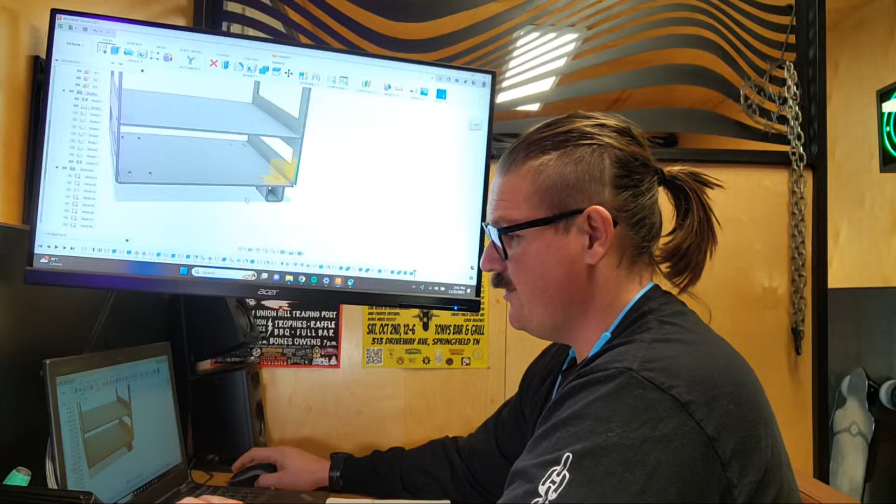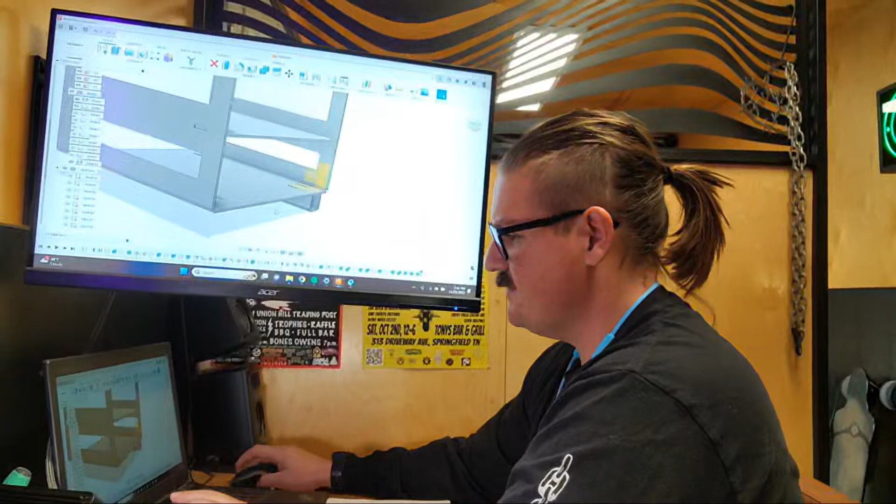Also, it's another reason not to go ahead and model up 2 of these feet, because then you'd have to do this extrude move on both of them, and it's kind of a waste. So I'm always trying to get a little bit faster, a little bit more productive in here, and it really comes down to the order that you do things and little tricks like not designing more than you have to get something made.

Sometimes if you have to model this up now at the very end, if I need to make drawings for the guys in the shop, oh yeah, making copies of sheet metal bodies is a bear. I forget exactly how to do it. I have to look up somebody else's YouTube video. That's what I always have to do when I get stuck on these.

But yeah, you can duplicate that foot, drag it over here, and then when you bring this over into a drawing, to explain it to everybody else, then both the feet will be in there and they won't be confused. But if you're just designing it for yourself, you can make this a lot easier. Oh, it's dragging all the stuff in here that is currently not visible.

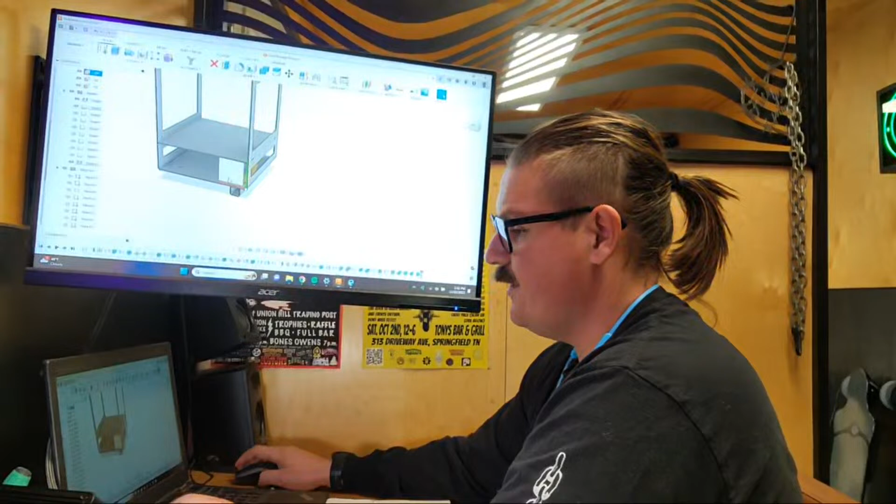Alright, so last thing I've got to do is split this body down the middle, because this is not going to currently cut. So the most efficient way to do that is actually as a flat pattern. So we'll go over here to sheet metal, I'll select this, we're going to create a flat pattern, and here's our flat piece. So go ahead and draw a line on here, and I'll do a rectangle. 0.0001, really tiny rectangle.

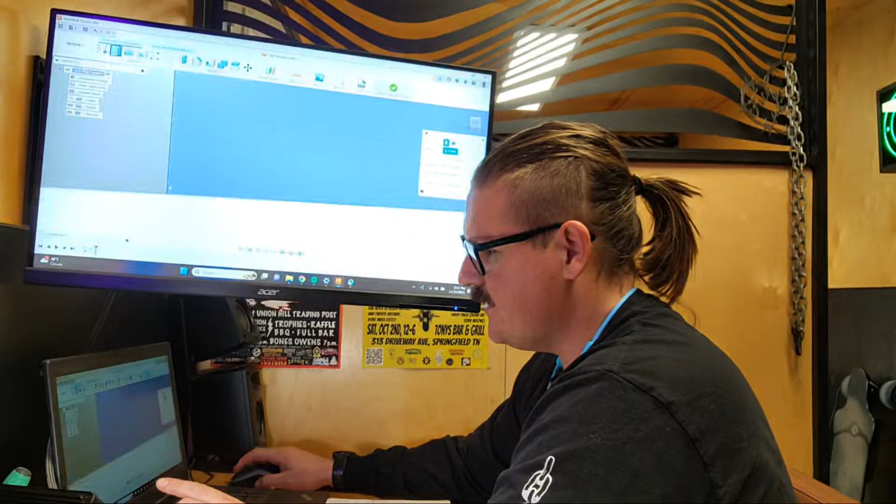Well, actually, so this is one way to do it. We could sit here, zoom in on this rectangle. Tolerance isn't that high. This is no big deal. 0.0001 isn't going to ruin anybody's day if I can actually get it to select it. It doesn't want to let me pick this. Okay, the other way to do this is we'll inspect, find this distance, 56.098.

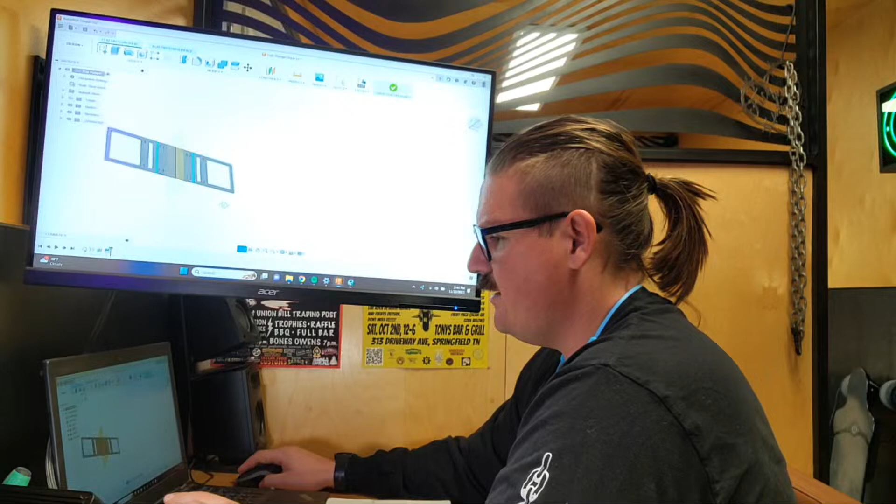And then we can do an offset plane. Oh, the sketch tools are not the same over here. Okay, I'm going to finish the sketch. Okay, here we go. Here's an offset plane. So I'm going to do negative 56 divided by 2. And that'll give us a midpoint. And from there, we can split the body. So we're going to take this body, select this plane as our splitting tool, and now we've got the two pieces. And we'll get rid of that sketch and this construction plane. So now our brake can actually handle this piece.

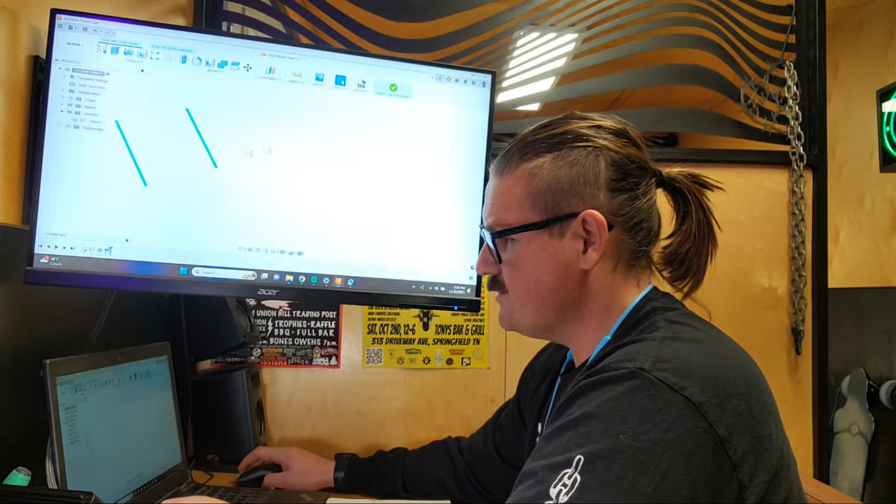So from here, that's pretty much it, guys. We just made a log storage rack. This is ready to export out to the laser, and I'll get it through the press brake and on the welding table and through powder coat, and then hopefully back to my house for Thanksgiving this weekend.